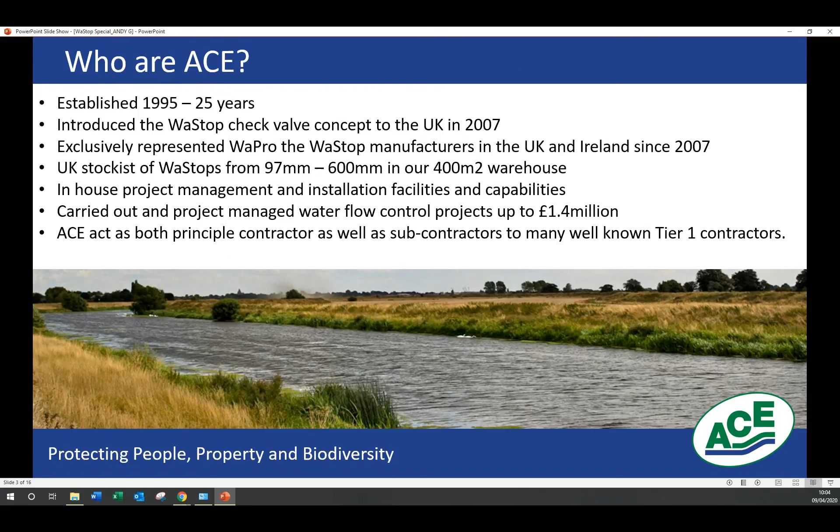But of course, we don't just supply them, we can also come and install them for you, and take them on as part of an overall project. For example, we've done full turnkey pumping stations where the outfall flap valve has been put in line with a WaStop, back to back.

Of course, the WaStop protects property and people, so it fits perfectly within our portfolio of products. And you can be rest assured that we've got all the accreditations that you'd expect from a supplier come mechanical contractor.

So to kick off, I thought I'd start with a really interesting case study for a 1.5 meter diameter WaStop which we supplied down in Poole. This particular WaStop was a perfect solution for a big timber flap valve which was constantly silted shut. It wasn't actually silt, it was shale. Shale kept building up against this wooden non-return valve, and literally 4 to 5 times a year they'd have to bring in an excavator to dig the shale out from the front of the flap valve in order to open it up again and allow normal discharge to continue.

Now, obviously that's not a very sustainable solution. Having to use an excavator is not very environmental because you're sending an excavator to site, burning fuel doing so, but also from a cost perspective it's very expensive. So Wessex Water and Poole Council approached Ace and said, is there anything in your portfolio that could solve this issue?

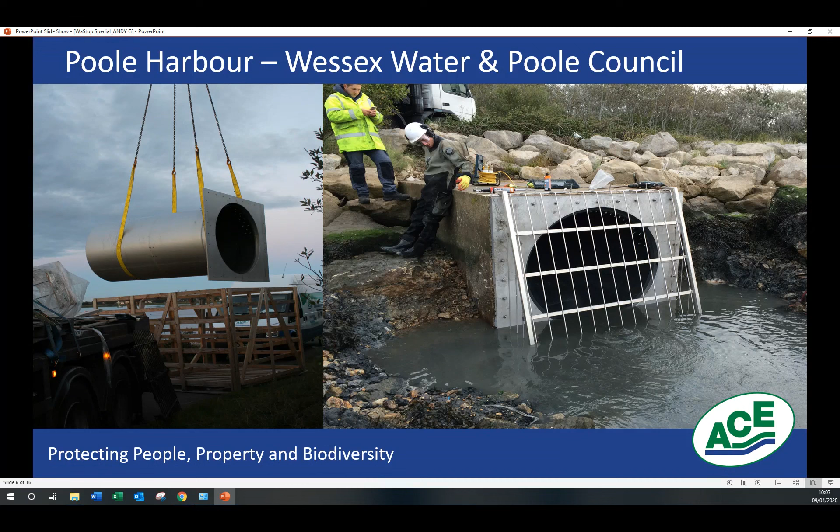I'll be honest with everyone, Poole Harbour, well Wessex Water, were a bit skeptical. They thought, well, not sure if this is really going to work, we're moving shale, quite heavy material, but we've had such a problem we gave it a go. 12 months later, the excavator's not had to visit site again. It solved the problem completely, so much so that Poole Council ordered another 6 large diameter WaStops, all between 1200 and 1400 mil with flanges, for some new outfalls we supplied down in Holes Bay. Still working perfectly, a very satisfied customer, it solves a lot of problems.

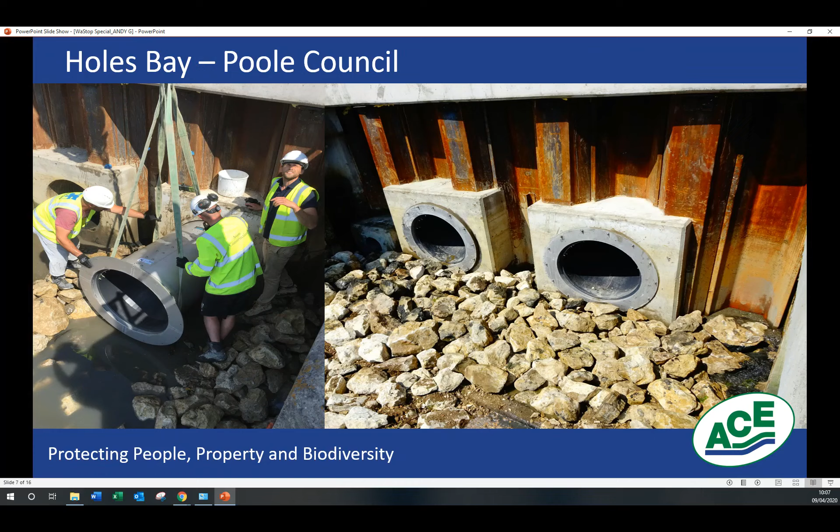We don't just use them for gravity-fed outfalls, they can also be used for pumping applications. This is an example in London, Barking and Dagenham area, where there's 2 Environment Agency pumping stations, Goresbrook and Beam River.

Now, Goresbrook and Beam River, when they were designing it, the Environment Agency were keen to use particularly heavy-duty, very robust flap valves, but wanted them completely in stainless steel. The issue you get with stainless steel flap valves, particularly in an area where theft and vandalism could be an issue, is there's a lot of money hanging on the wall for a potential thief or vandal. They were nervous and thought, how can we hide this?

So we suggested the WaStop. It works perfectly well for pumped applications, so you could slide the WaStop into the pumped outfall, and therefore you've got the benefits of the non-return valve, but everything's hidden.

So it's not very visible, it's not very obvious what it is, and it's not easily going to be stolen.

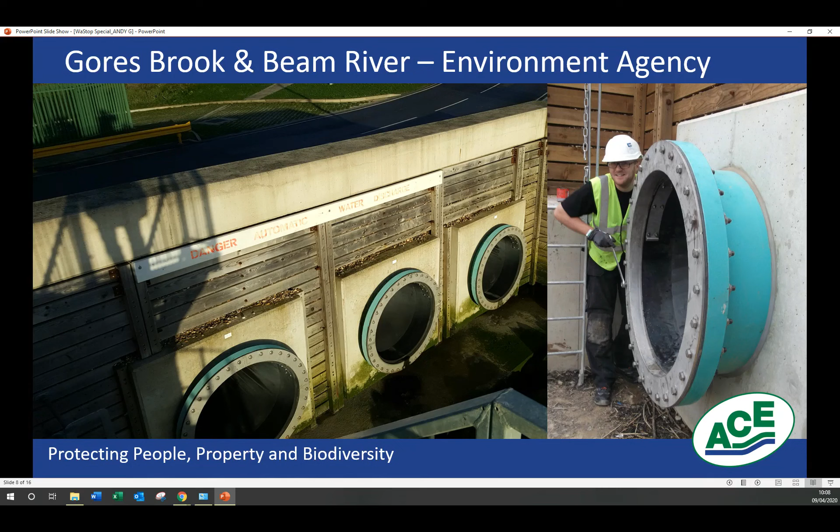These have been installed since 2010, and the Environment Agency is still using them at the moment, 10 years later. This also proves that with a pumped application, they've still got an incredibly long life.

This little video here is from the Southwest, and it's nice to show how WaStop's bespoke flanges can solve a lot of your issues where it comes with flush inverts.

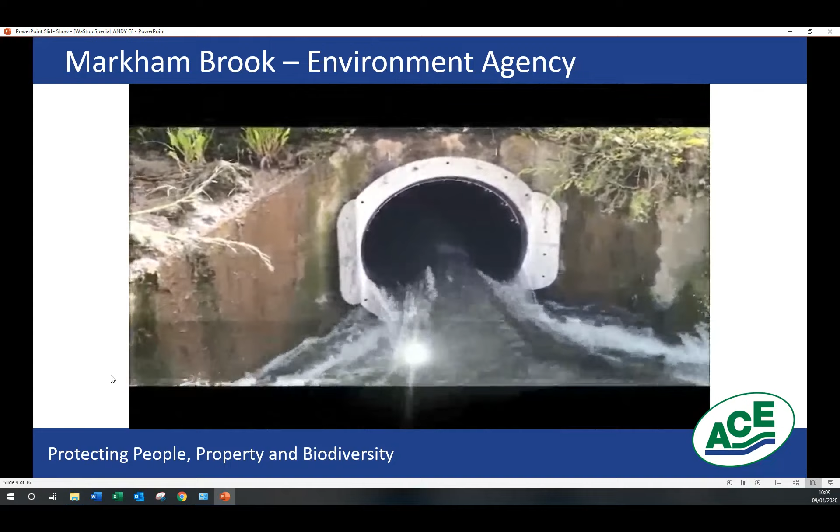For example, here the pipe invert is flush with the sill, and also you can see the wing walls are very tight, so you couldn't fit a flap valve frame on here.

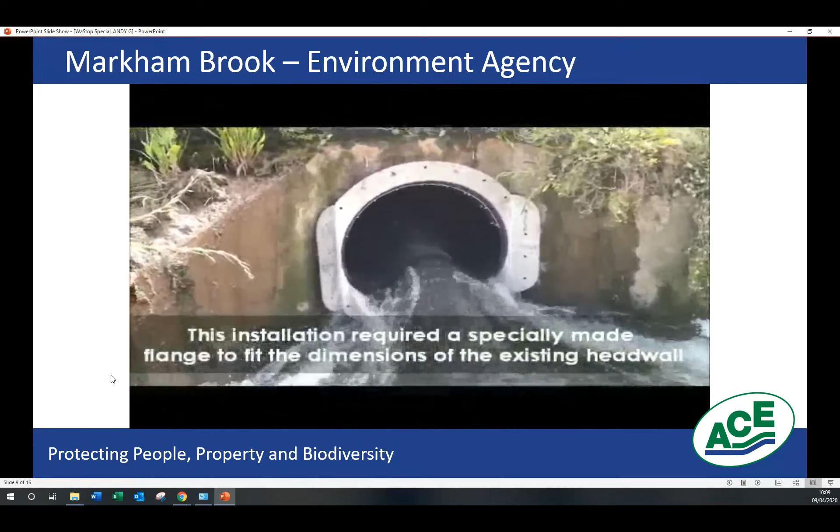Therefore, by supplying a WaStop which slides inside the pipe and putting a bespoke flange on the outside, it means that we could create a solution without having to completely remove the head wall and put a new head wall in.

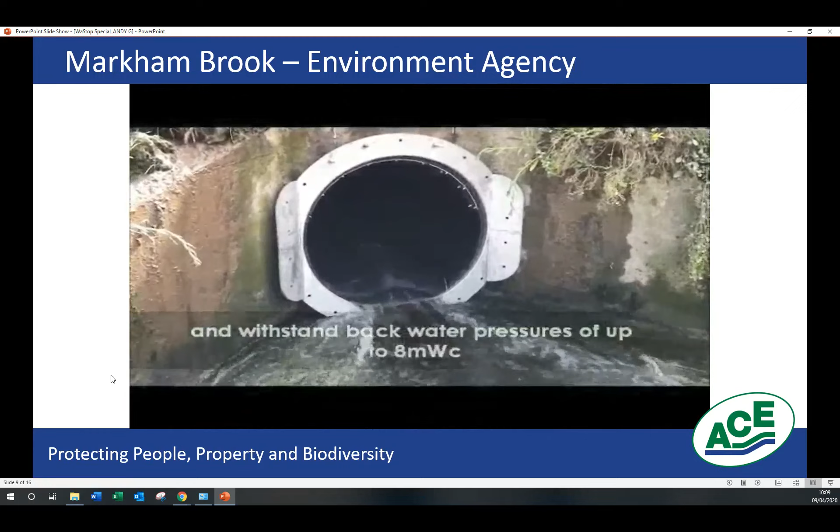The video there gives you a sense of scale, but also showed the low closing pressure, so you'll never have too much standing water in your pipe.

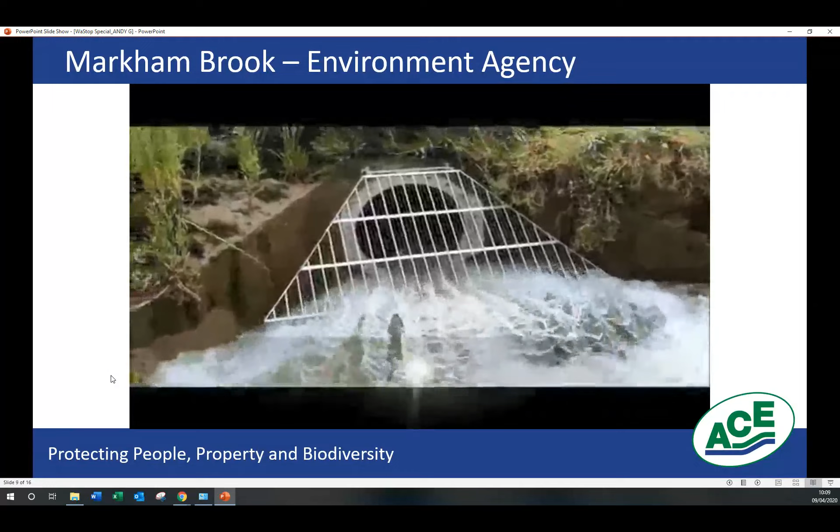Having a little bit of standing water is actually a good thing in a lot of scenarios, particularly for utilities industries, where you don't want any matter drying up, because of course it starts to restrict your pipe diameter.

So by keeping some standing water in there, it keeps quite a lot of the debris floating or suspended, and therefore your blockages are less likely to build up.

That was a bit of a problem which they had at Walhall. So this is Thames Water. They actually started using so many WaStops off the back of this that we have a Thames Water framework for the WaStop.

Thames Water on this particular application had problems where the flow in a fairly level pipe was frequently causing the debris to block up any type of non-return valve that they tried to put down in this culvert.

They tried flap valves, they tried all sorts of different non-return valves, and every time it would get blocked. They were getting to the end of their tether, to the point where they thought, well, we're just going to have to put a pumping station in, and by pumping we can keep the materials moving, we can keep the flow higher, and we solve the problem.

The downside of pumping, of course, is building a pumping station here. Even though it's only a small unit, they were still looking at a total cost of £250,000 roughly. So he said, before you spend that £250,000, try a WaStop.

It's likely to work because it creates this flushing flow, because it's got this opening and closing pressure. It bursts open, your level drops, it closes, the level raises.

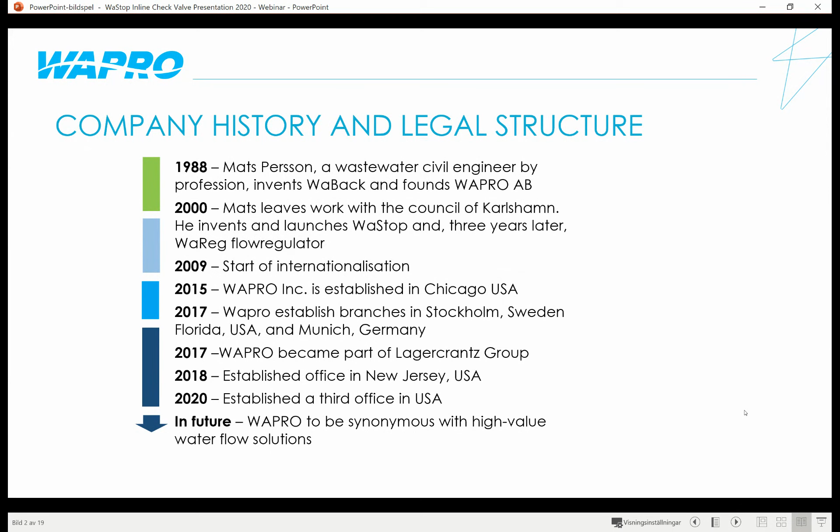So let's jump ahead here. We are very proud to say that WaPro is a market-leading provider of high-value flow regulation and protection solutions for both flood, surface and wastewater, primarily in gravity-fed systems. But as Martin said before, we are able to supply the valve to pump applications as well, using a bespoke membrane and bespoke fixings. So it's a kind of a different solution there.

At our facility here in Karlshamn, Sweden, we design, we source, we assemble, we test, and we sell the solutions based on patented technology. So everything is made in-house by WaPro. We have our own technical support team based here in Karlshamn, as well as the production team. So every valve that we provide to ACE, for example, we test ourselves.

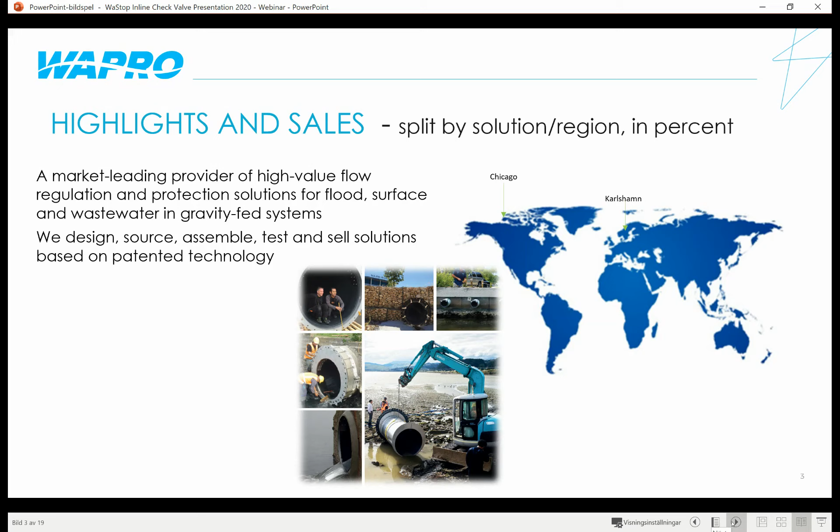We test the opening pressure, like Martin talked about. We test the closing pressure. We're also able to test the back pressure for the different valves. At the moment, WaPro are working with 20-25 countries around the world, and we have around 55,000 installations worldwide for WaStop. I'm not going through all of them today, but I'm going to show you a couple of case studies.

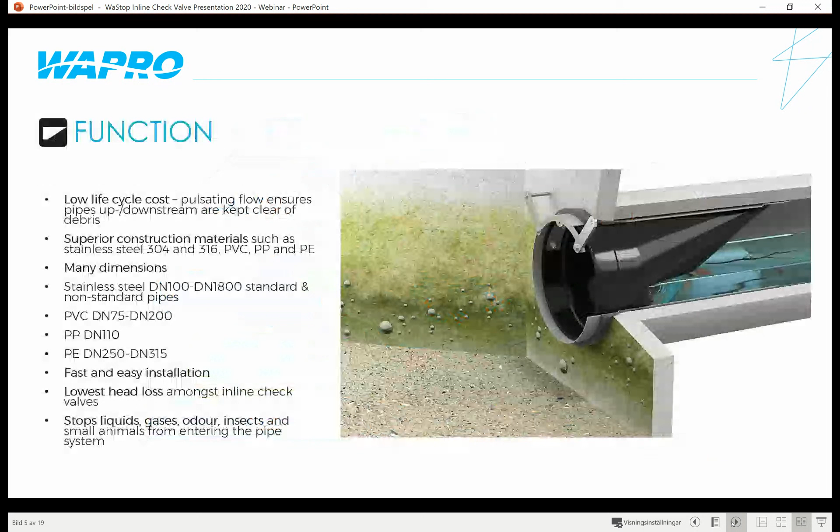So let's jump into the WaStop inline check valve. And I would like to start with a short video here to just show the function of the valve.

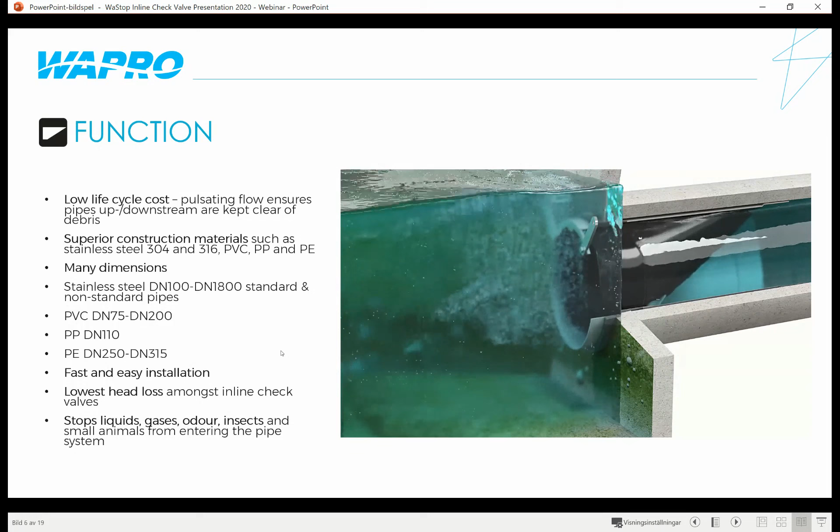As Martin touched upon before, what makes WaStop unique is that the valve requires a certain amount of pressure before the membrane pops open. So WaStop builds up a pressure enough to let the membrane pop open, lets the water out, immediately closes, builds up new pressure, opens, builds up new pressure. So every time the membrane pops open, we ensure a pulsating effect, which minimizes the risk of debris, for example, getting trapped between the membrane and the stainless steel valve. It also ensures that if we have a lot of sand build up and debris build up in front of the valve, that gets flushed away as well.

And if we take a look at the membrane here, as you can see, the membrane is conical, and there is a reason for that. If we have a lot of sand and silt build up inside the pipe, what will happen is all the heavier particles will collect closer to the bottom of the membrane, and the farther upstream we go, the cleaner the water is. So when it's time for the membrane to pop open, the heavier particles get flushed out first.

In terms of construction material, we have two different types of valves. We have the stainless steel version, intended for insertion into pipes, and we also have a plastic series that's intended for inline installation. So if we have a pipe section, we can cut the pipe section in half, insert the valve, and the outside diameter of the plastic valve is the same as the specific pipe, with the valve mounted using flexible couplings, whilst the stainless steel version is for insertion.

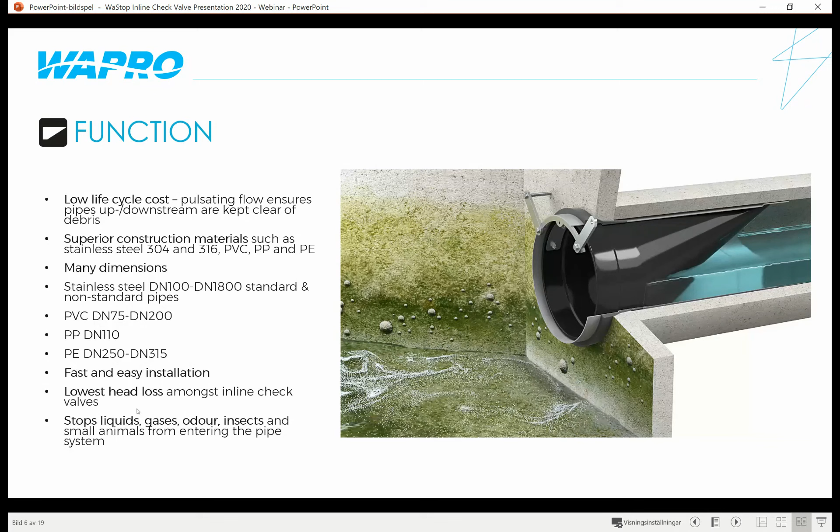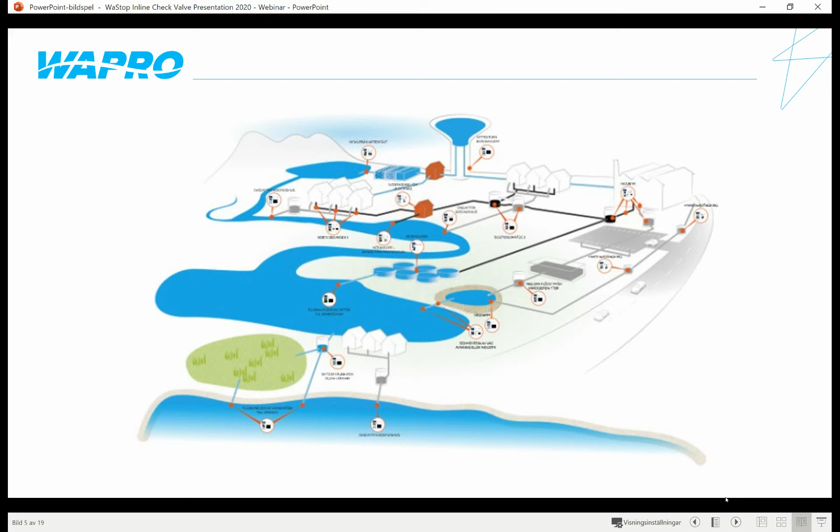We can also produce valves with elliptical flanges, depending on the application, as well as vertical installations. That is quite common, actually. We supplied, I believe it was 110 valves to Oslo, because in Oslo they had a combined sewage and stormwater culvert. And in dry periods, a bad smell entered up to the pavement. So an easy way to fix this was for the council to install the valve vertical to let the rainwater through, but prevent against the bad odor entering up to the street.

Yeah. ACE has already done some applications in Hull, for example, where we had a row of WaStops vertical underneath a quay, so that the sea could not come back in, but the water could drain on the seawall. And in Cumbria for a similar application to what you're talking about.

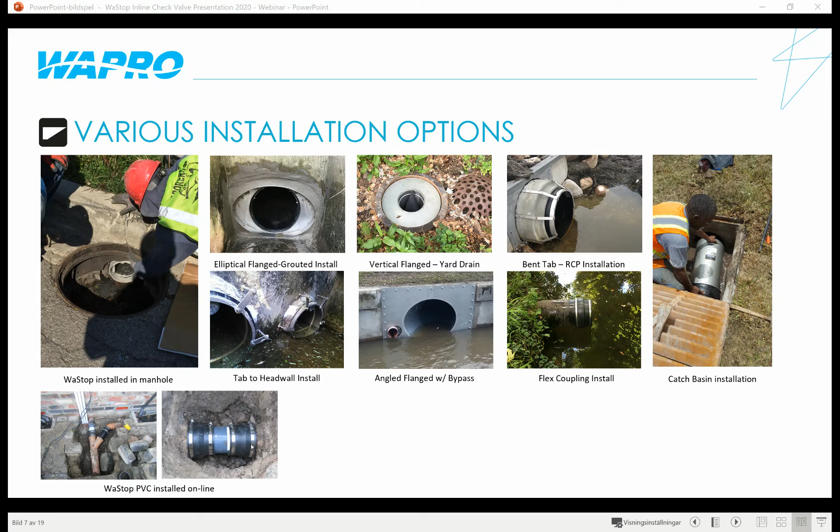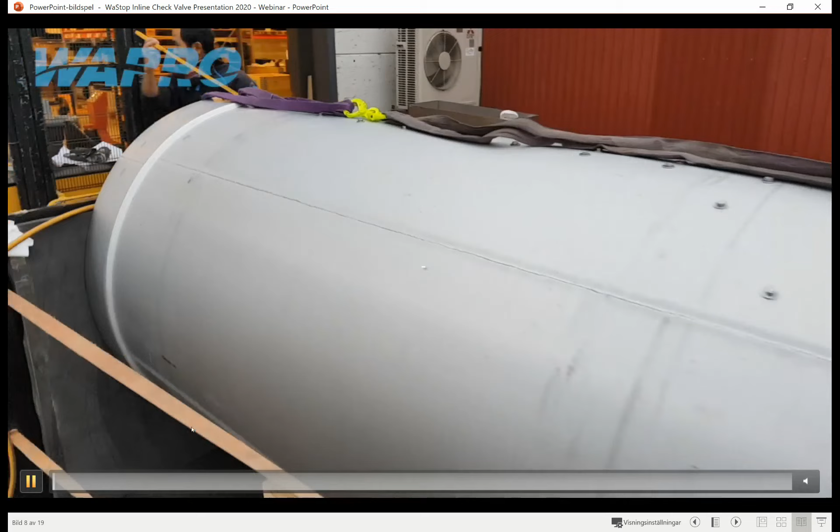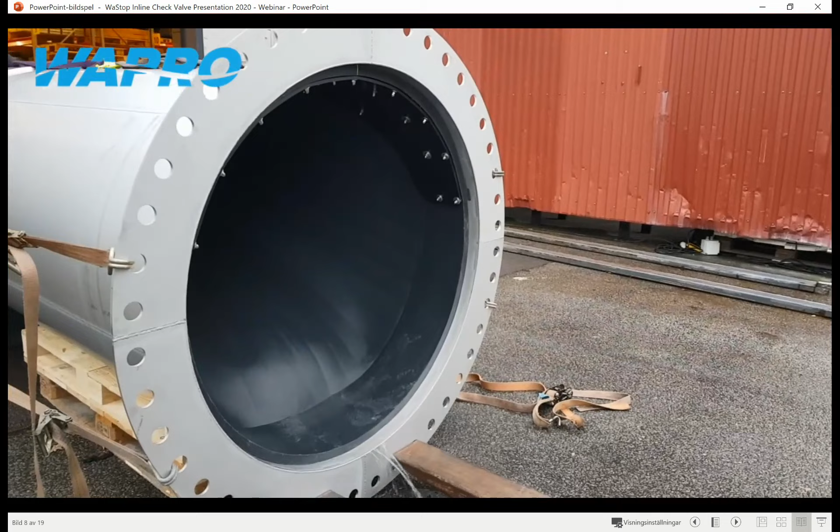So I'm going to show you a short clip here of us testing a DN1200 WaStop to showcase this pulsating flow effect. And what we wanted to showcase here is that even if we don't have a tremendous amount of water upstream, the membrane will still be able to build up enough water to flush the pipe clean and flush the debris out from the valve. So we fill it up with everything we can find. One shoe, cans, bottles, towels, everything.

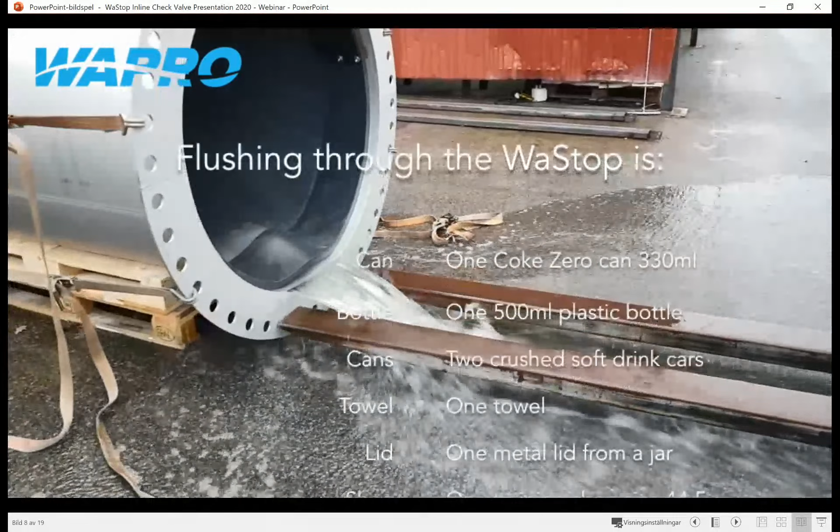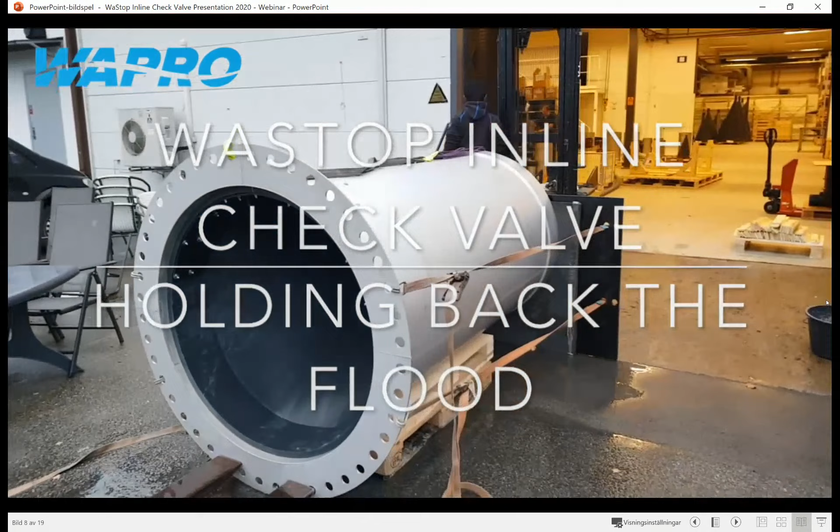Should debris get trapped between the membrane and the valve, another unique thing with WaStop is, since we're using a very flexible memory membrane, as soon as we have a backflow event pushing against the membrane, it will go slightly backwards and slightly downwards, ensuring somewhat of a seal against the trapped solid. Enough to build up enough pressure behind the membrane to have this pulsating effect. So to some extent, the WaStop valve is self-cleaning as well.

And that is a difference between the WaStop and a flat valve, for example, because if we have debris getting trapped between the flat valve and the pipe, the flat valve will be somewhat pried open. But with the memory membrane and the flexible membrane, we will still ensure somewhat of a seal.

All right, let's jump into the head loss. And this is quite interesting because it can be a bit difficult to compare head loss data for different products on the market. One of the reasons why it might be difficult is, let's say a company would make their figures look a little bit better. They might use the reference point to measure the data at the top of the pipe, which will exclude the total diameter of the pipe itself, and they might not include the total exit losses of the pipe outlet.

In all of WaPro's data, we use the reference point at the invert level of the pipe, which means that we include the total diameter of the pipe, and we include the exit losses of the pipe outlet. So, to compare WaStop with a competing rubber inline valve, we did third-party testing at Utah State Water Laboratory to test the different head loss data. The blue line here is WaStop, and the black line is the competing inline rubber valve. So we use the same reference points, the same testing facility, the same open air scenario.

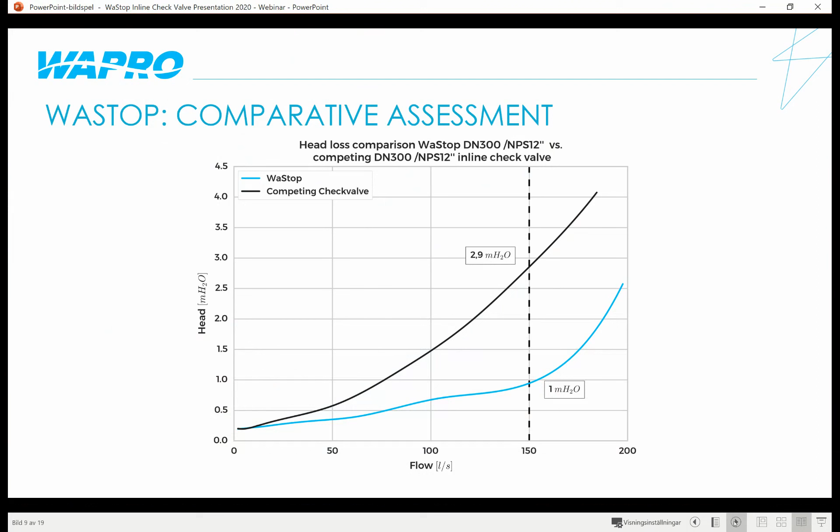WaStop is also certified according to the European standard, CE certified, and the standard range when getting the CE certification for the valve is nominal diameter from 80 millimeter up to 200. So that is just a standard range.

But we ensure that all the valves that we produce, whether it's a 200 or 500 or 1800, follow the exact same testing procedure where we test the opening pressure and the closing pressure of the valve, as well as the backflow against the valve. So we have a very rigorous testing procedure here at our production facility.

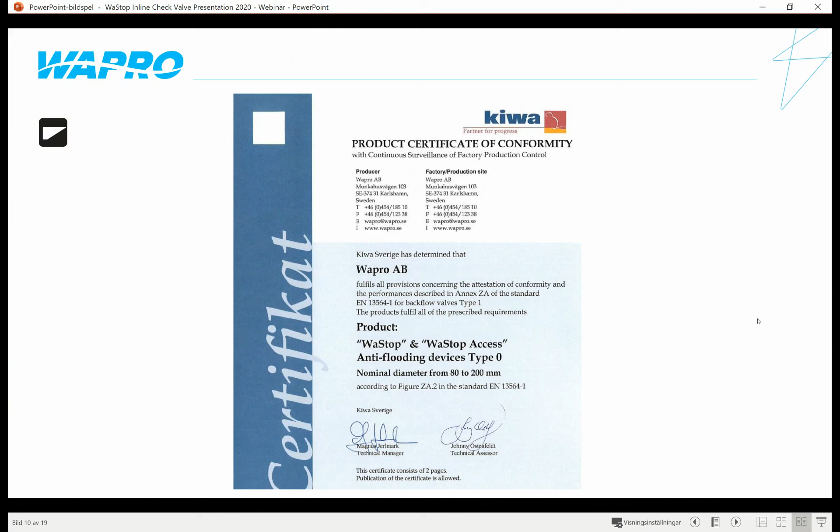So let's jump into a couple of case studies here. This is in Lomma, Sweden, and this is a stormwater outfall. And the problem here was that every time the sea level was high, a lot of seaweed and sand got flushed up against the outfall, collecting itself inside the pipe, causing the council to spend approximately 7,000 euros per year in maintaining this specific outfall.

So the council phoned up WaPro and said, hey, can you help us with this solution? So we had a survey and we had a look at the pipe. We concluded that the pipe is a concrete 800 pipe, which means that we have 800 millimeter internal diameter. So we could use a standard WaStop. To ease the installation for the customer, we also manufacture bespoke fixings to suit a specific outlet.

So due to the thin material of the valve, two guys could actually lift the valve up, push it in place, and then bolt it straight into the pipe outlet. The installation took approximately 40 minutes, so it's very easy to handle.

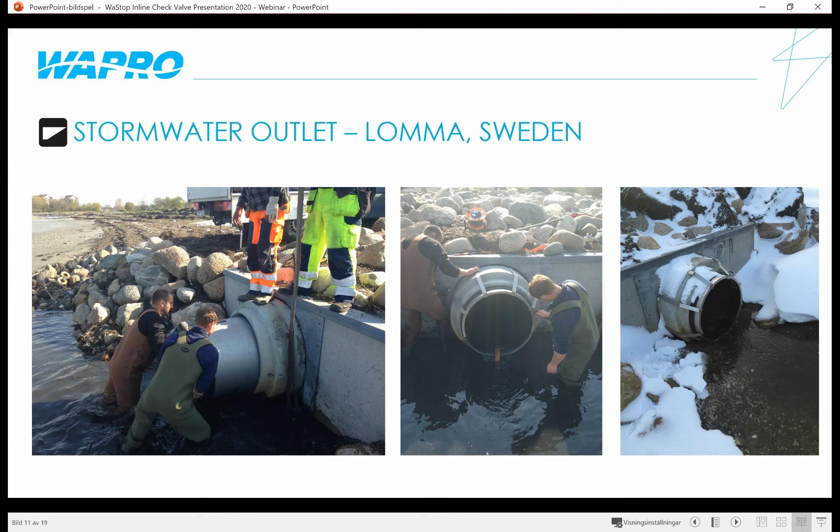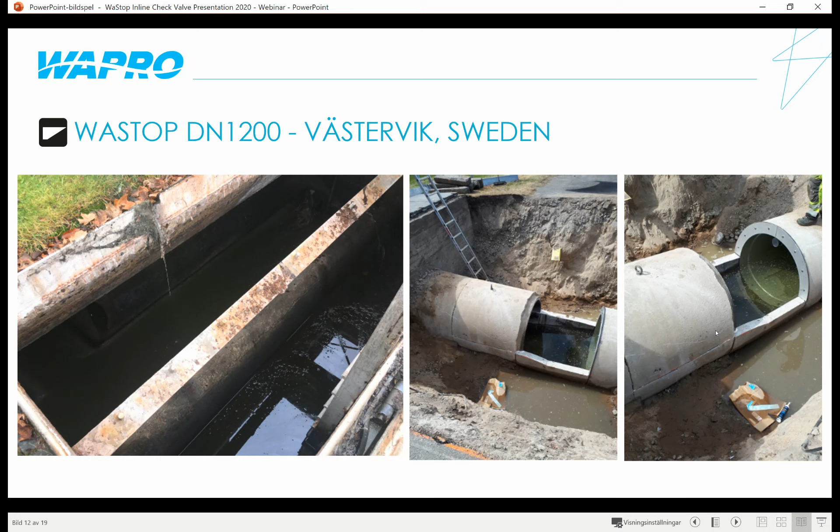So the council has spent approximately 8,000 euros per year in maintaining this specific pumping station to clean it from sand. Because a side effect of this was that the properties in the surrounding area got basement floodings every time this happened, because the pumps were insufficient to cope with the amount of sand that was flushed in.

So we changed it to a WaStop. And because we have a pulsating flow, not only were we able to clean the pipe upstream, but we also ensured that the sand in front of the valve got flushed away. Obviously, if we have sand buildup covering the entire pipe, some type of maintenance will still be required, but we still prevent the sand from entering into the pump because the membrane is always closed.

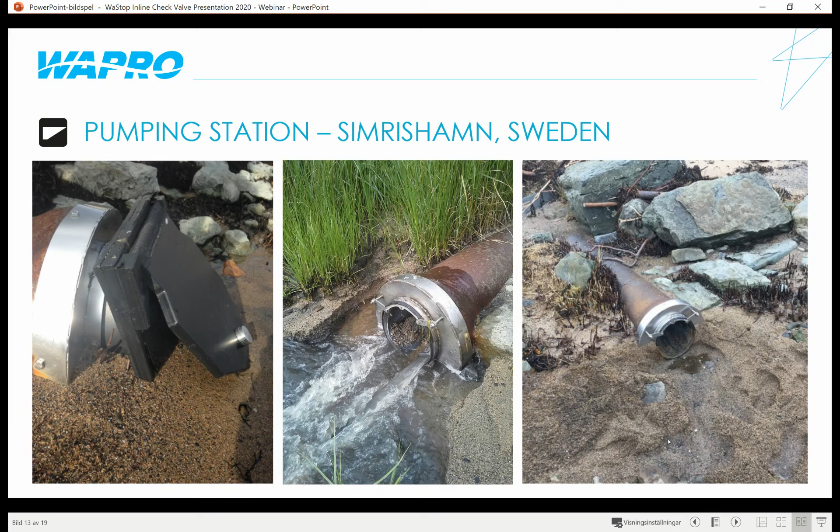So by utilizing this type of solution, we have now helped the customer to minimize the maintenance from every 3 weeks digging sand to virtually no maintenance at all. And again, this also showcases that we do have the capability to make customized solutions.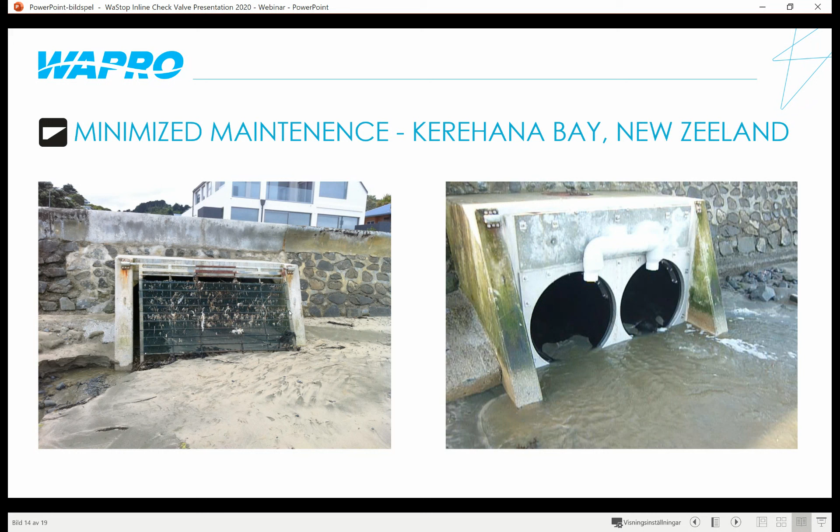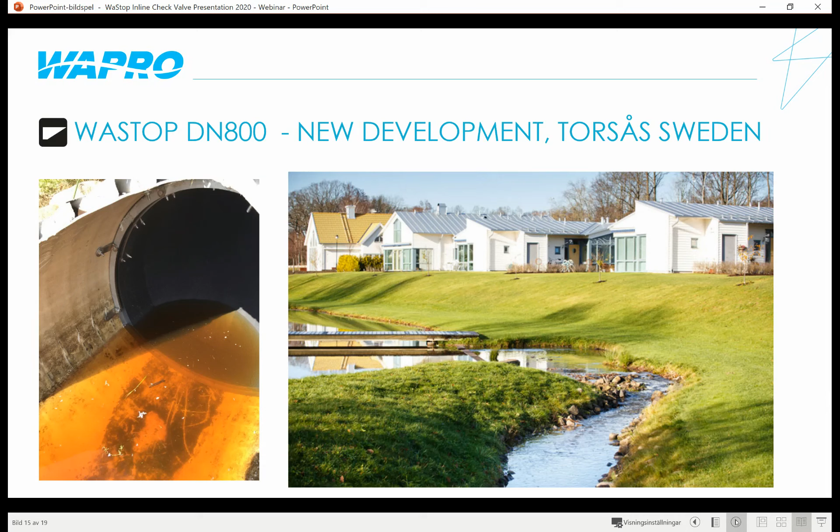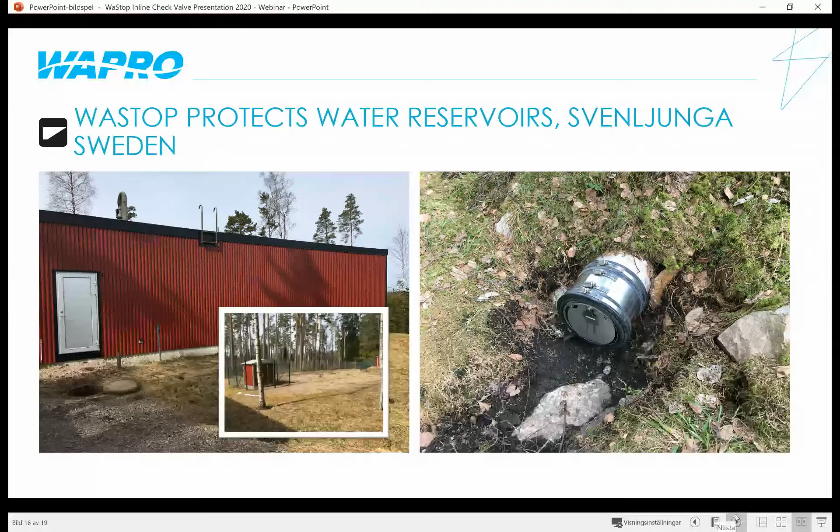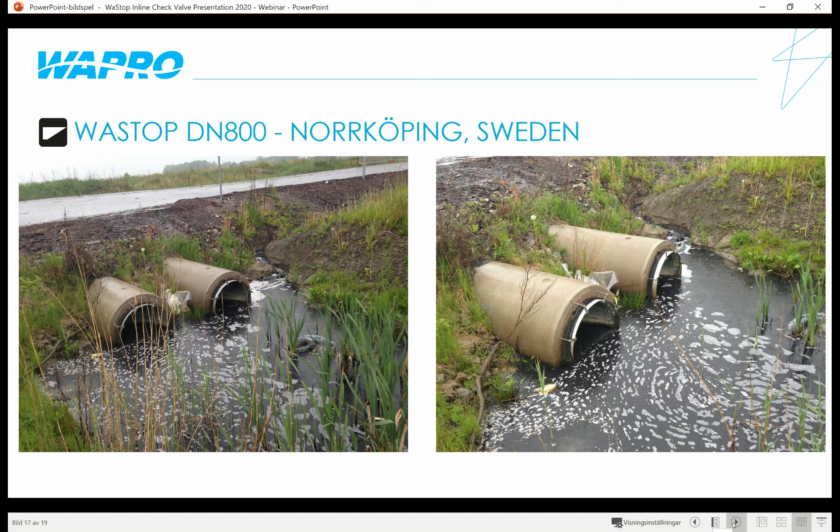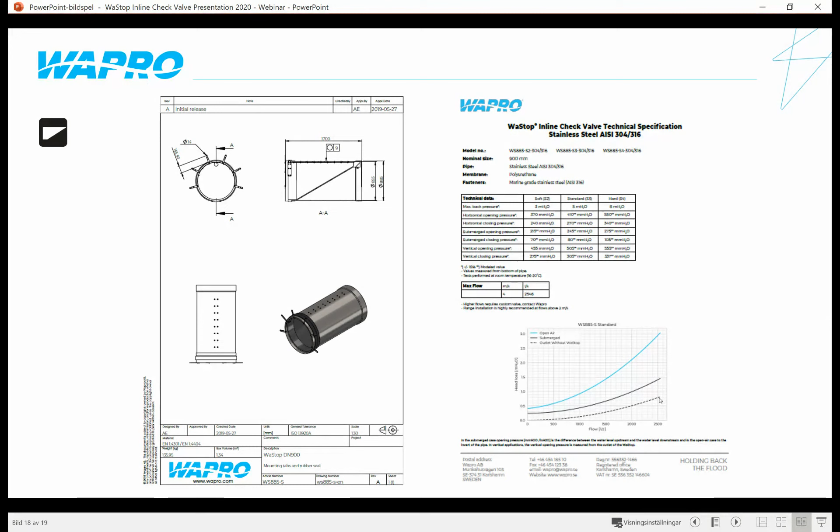All right, that was all I got for today. I thank you for your participation in this webinar, and I will leave it up to Martin to end the presentation here. So thank you.

Thank you, Martin. If you could put the presenter back to me. Yes, that would be great. Thank you. Can you see the screen? No. I'll stop sharing and try and share again. Is it working this time? I can't see the presentation.